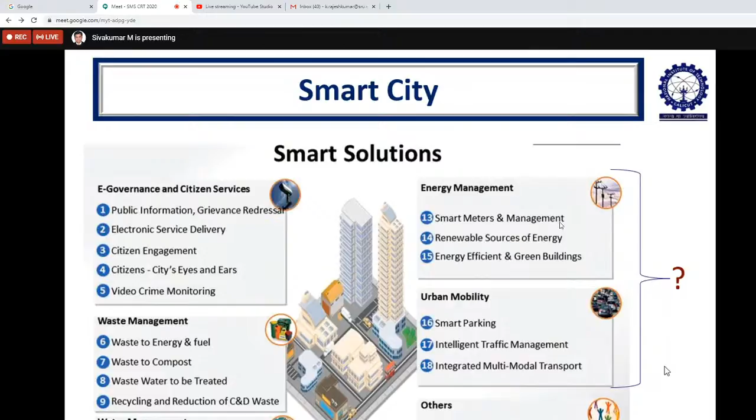It may be just a recall, because all of us know what is smart city, its components and solutions. The features of smart city would have been discussed already. Being the 11th session of this program, it may be a repetition, but to recall the smart city components and how I am relating it to pavement concerns, that's why I have indicated here.

When we take the features of smart city, I am specifically taking these 4 points. There are n number of points indicated in the guidelines, but these 4 points are with respect to road infrastructure. Mainly smart city is implemented for promoting mixed land use, meaning commercial activity as well as residential activity or educational activity, everything in a single platform.

Mixed land use will help for growth of people, even in unplanned areas. The people living in unplanned areas may not have received any implementation for the last decade. But with smart city, even the corners, the tail end points, will be connected by providing better transportation facility through better road infrastructure.

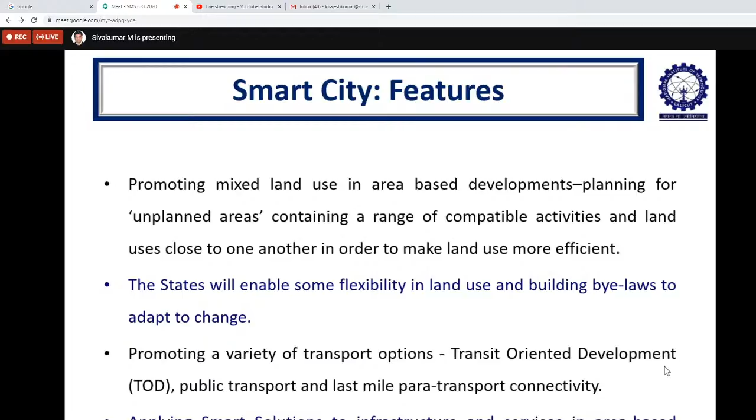Based on that, we can promote transit-oriented development. Once these roads are implemented in such quality that people can occupy both sides, we know transit-oriented developments promote public transport usage, which we can increase, while also connecting even the last point of the country. So by applying smart solutions, how this road infrastructure can be designed by selecting smart or sustainable materials, we are going to discuss in this presentation.

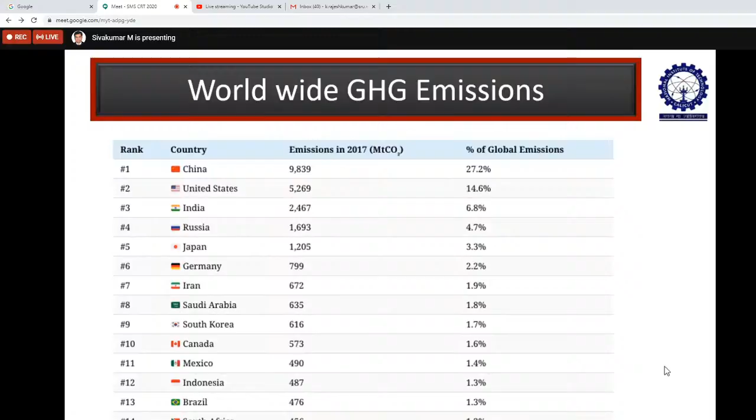When we think about sustainability, mainly in terms of GHG, greenhouse gas emissions, I am concerned more with Indian conditions. India is ranked third in 2017 emissions, at 2467 million tons of CO2, contributing nearly 6.8% of global emissions, even though it's 6.8%, it is ranked 3rd in contribution. According to carbon brief data publication, in 2017 alone, India contributed 1.8 tons of CO2 per capita to global emissions.

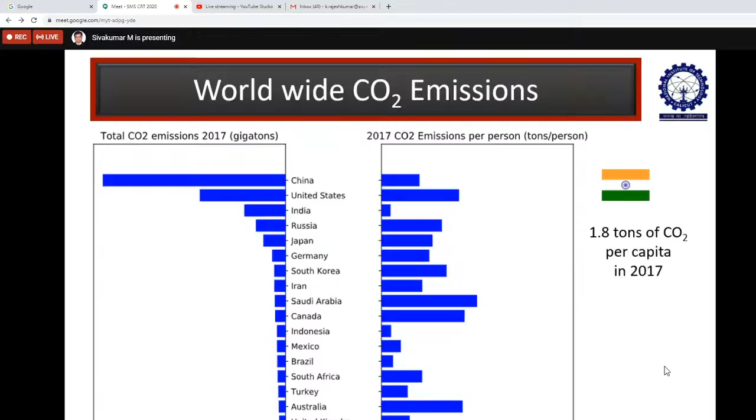What are the sources of this pollution or these emissions? Mainly the major concern is around 45% air pollution from dust and construction of infrastructure, whether building or road or anything. Again, the movement of vehicles, that is transport, contributes 14%. So adding it up, nearly 59% is contributed by the transportation sector plus residential construction or any other construction activity. For construction activity, movement of materials by transportation becomes an important role.

Then automatically the service, that is the road, should provide smooth riding quality. Then only the vehicles will move at the desired speed. If the roads are not in good condition, speeds will come down, more unburned fuel, fossil fuels, will be there, and automatically emissions will increase. When more vehicles move in slow conditions, the contribution to emissions at that location will be high. Next, waste burning contributes only 17%.

We may think that industry contributes more, but it contributes only 8%. So here the major portion is contributed by construction activity and the dust developed from different resources.

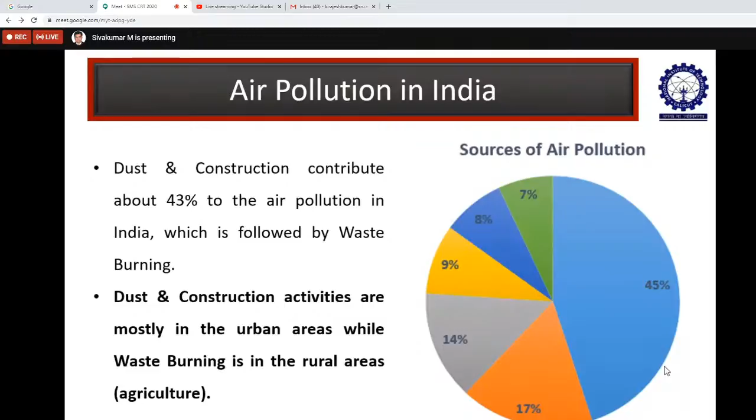This is how the three strategies are planned. The first strategy is the business-as-usual scenario, meaning if the same vehicles with internal combustion engines keep running, then by 2050 we may be producing more CO2, around 4,600 megatons.

That will be equivalent to 2.1 billion passenger car emissions. Passenger car units are taken because transportation emissions are expressed in equivalent passenger car units. So if 2.1 billion cars' worth of emissions exist, the number of vehicles equivalent to that is 2.1.

The second strategy is electrification and automation, again used individually, not by sharing. There, emissions will be reduced to 1,700 megatons of CO2.

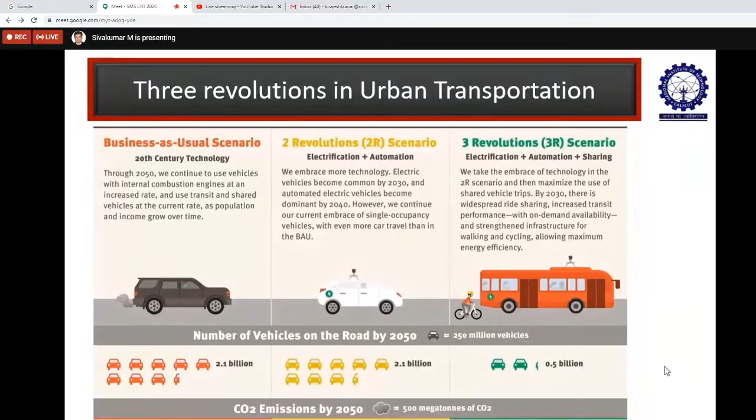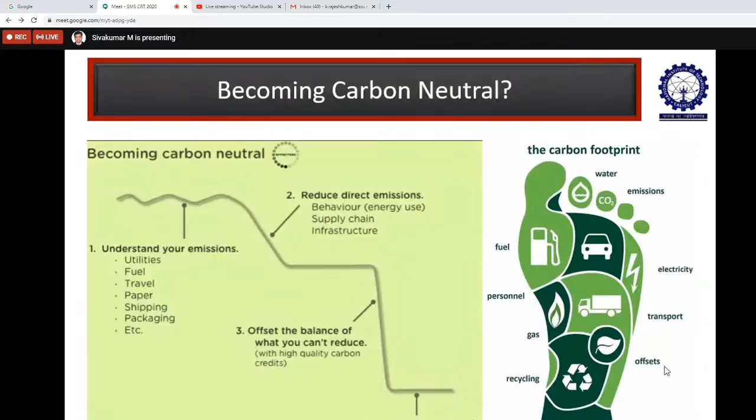If more bicycle usage is there, as you can see in this graph, it leads to more reduction—reducing carbon emissions close to zero. It can be achieved through bicycle usage, but practically it may not be possible because it takes more travel time. So that is different.

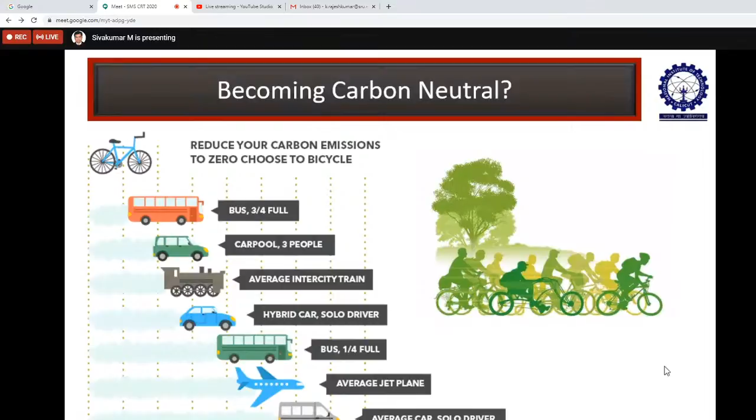But if you take the bottommost one, an SUV or solo driver individual vehicle usage, it reduces only 1.6 pounds per passenger mile. This is the reason why sustainable material should be used in pavement construction.

The next immediate solution involves the strategies or stages of road construction. Once materials are selected and pavements are designed, they are constructed. During the service life, there will be rehabilitation. Even after rehabilitation, there may be progressive deterioration—cracking, rutting, or other failures may take place, until the material reaches the end of its life.

That means after that point, the materials cannot be used as they no longer satisfy the desired properties—whether it's aggregate, binder, or road materials—so they can be disposed of. But if some quality is retained and it can be used further, then it can be reused, as it is.

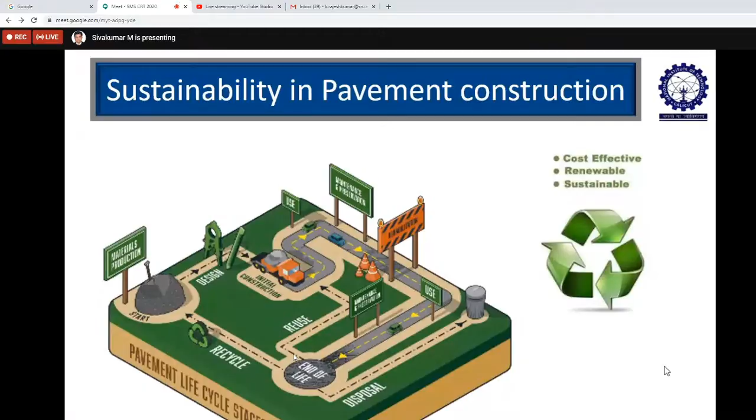Otherwise, we can go for recycling, meaning adding rejuvenators or new virgin materials. If binder quality or quantity is insufficient, we add more binder to the existing mix, remix it, and construct again. Likewise, recycled aggregates can be directly reused. But we must ensure the recycling or reuse technology is cost-effective, renewable, and sustainable.

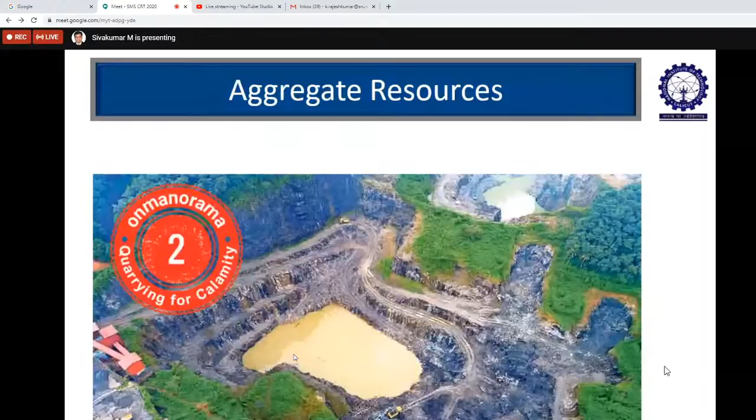This is one of the problems driving us towards sustainable materials: scarcity of aggregates. Most of the hills are disappearing now; there are no hills left with good quality rocks, everything is taken away. This is a picture from a Kerala location published in Manorama News, where aggregates are taken away, broken, and segregated into different sizes for constructing buildings or other construction.

Next to building construction, the major contribution for aggregate use is road construction, whether it's a bituminous pavement or cement concrete pavement.

When you take the case of bituminous pavement, there are different layers. The natural soil subgrade is either the same material or material brought from a nearby location, meant to achieve a CBR of 10% and be compacted. Just above the subgrade, the granular materials layer begins, where aggregate usage increases. All the top 4 layers above the subgrade consist of large amounts of coarse aggregates.

In the intermediate and surface layers, bituminous materials are used as binder - bitumen binds the aggregates. This is taken care of in the top 2 layers.

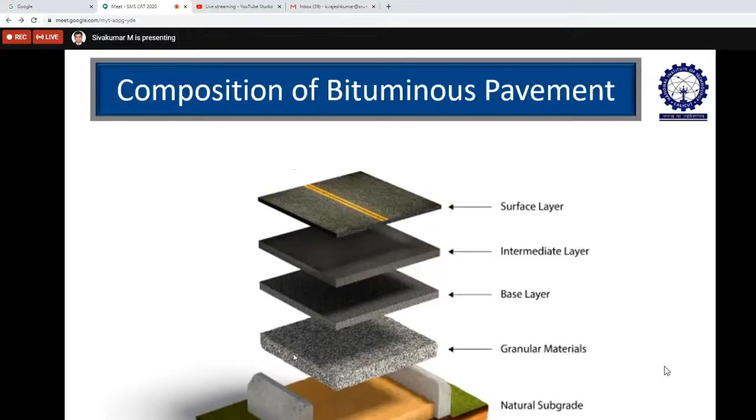What happens over the period? For example, when we design the pavement as per IRC 37 guidelines, we may design for 20 MSA or 50 MSA million standard axles, maybe for 500 mm thickness. After the rehabilitation period, the thickness may increase due to the rate of increase in traffic growth - the axle load increases, so automatically an overlay is provided to strengthen the pavement's structural and functional characteristics.

Over a period, what happens is this: material that disappears from one location is found here as a huge hill - meaning the material is reused for constructing another layer on the road itself, becoming more aggregate. To avoid using more material, if you keep constructing overlays, the bottom layer will have aggregates that may be reused material. Good quality material may still be there - it may not have 100% quality, but it may have 70%, 60%, or even 80%. These materials just lie below the overlying layers.

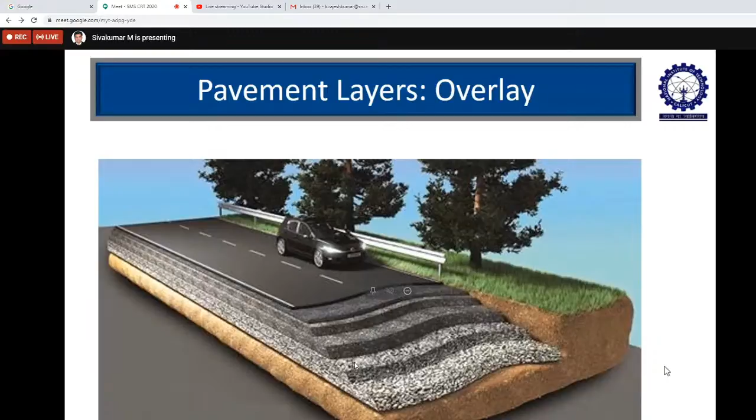So here the technology implemented is recycling - meaning whatever materials already exist in the existing bitumen layer can be recycled for construction of additional pavement layers.

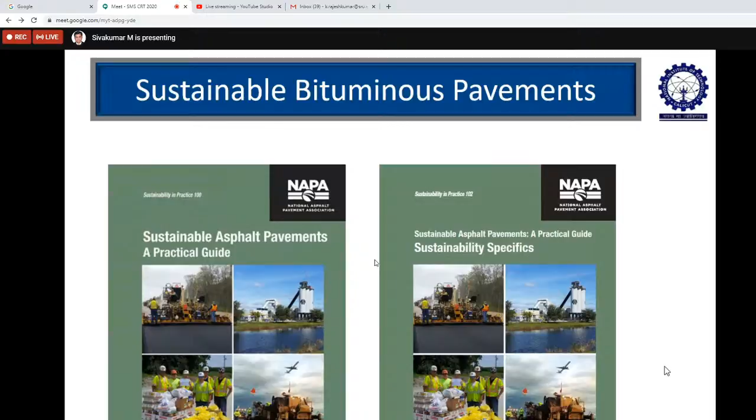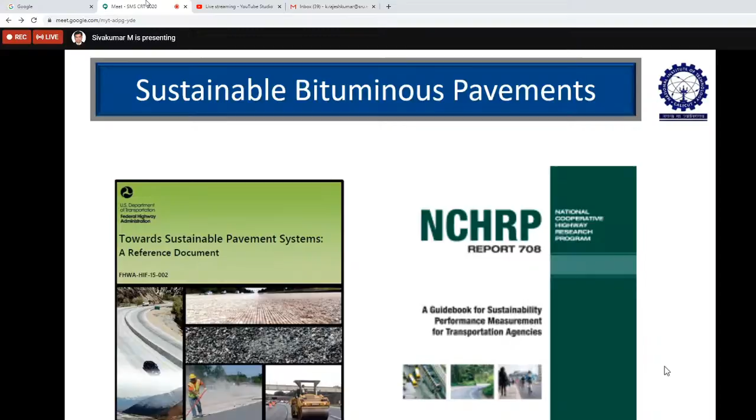This definition we all know - one recognized worldwide, I think: the Brundtland Commission, given in 1987 itself, states that humanity has the ability to make development sustainable, to ensure that it meets the needs of the present without compromising the ability of future generations to meet their own needs. This definition all of us know, so I'm taking the same quote.

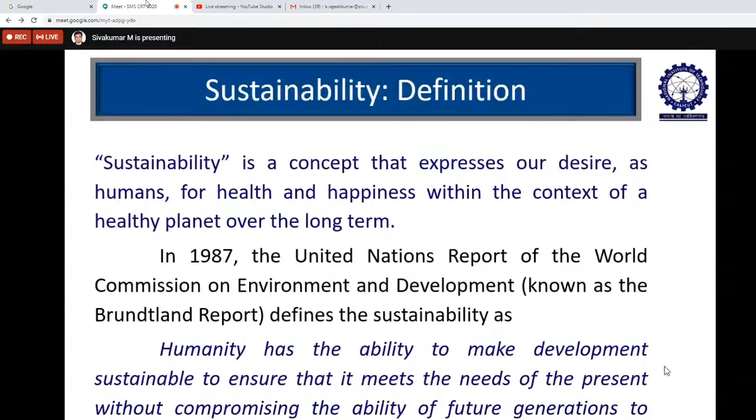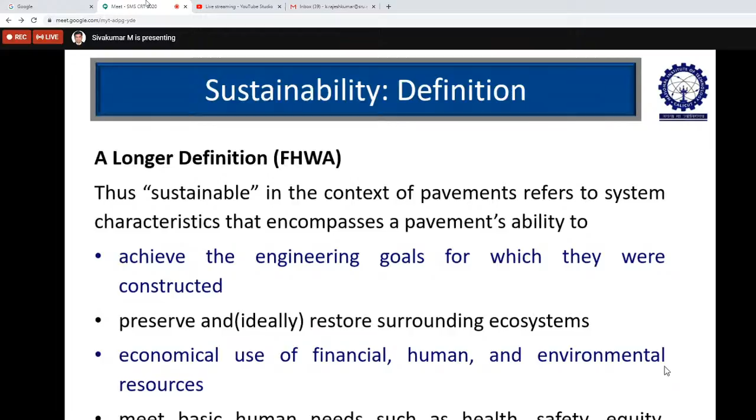As a longer definition per FHWA, sustainability mainly means achieving the engineering goals for which roads were constructed, while preserving, or ideally restoring, surrounding ecosystems. Wherever roads are constructed, the ecosystem should not be affected - whether in the city, open area, or forest, different construction technologies should be used without affecting ecosystems. Financial, human and environmental resources should be used economically, and basic human needs such as health, safety, equity, and employment should be met. This is the long definition given by FHWA.

As far as sustainability in pavement, a sustainable pavement can be defined as we recall while designing the pavement: the aim of the road is to provide safe and efficient, effective movement, constructed using economic resources. This is recalled as a safe, efficient and environmentally friendly pavement that meets today's transportation needs without compromising the ability to meet future needs. That is the main thing. Mainly in the transportation sector, bituminous pavements are mostly constructed.

Even in the Indian case, more than 90% of constructed roads are bituminous pavements - that is the black top road, identified by color. In these, the top layers - the wearing course, binder course, or even the base course - can be constructed with bituminous materials. These materials have different functions, and how these functions are satisfied we will see in further slides.

The principal criteria for selecting or designing a sustainable pavement is mainly optimizing the use of natural resources. As far as possible, if we take aggregates, we can reduce virgin aggregate use - instead of always using new aggregate for construction, we can reuse recycled aggregates. That is one way.

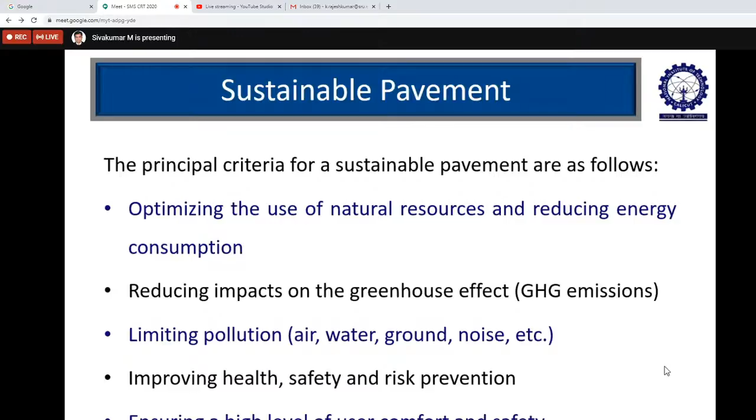When we talk about energy consumption, it is mainly related to construction, maintenance, rehabilitation and recycling of pavements. All these four stages will be taken care of for energy consumption.

Because of pavement sustainability, when we go for smart city development and new projects, there will be new road development and also habitat loss - either people living there may get affected, or people living far from new roads may move near them. There will be habitat loss as well as fragmentation, change in locality, and water quality or hydrological cycle may change. Air quality may also get affected when new pavement is implemented. So all these components contribute to sustainability.

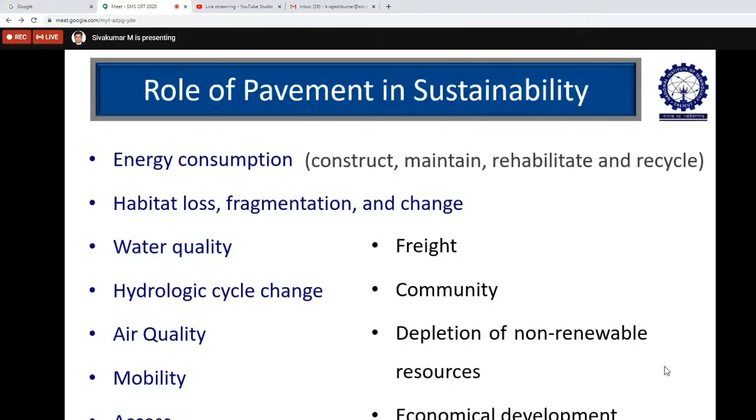How can this be achieved? These are the three stages I am going to discuss in this presentation. First stage is material production. Second stage is how it can be constructed. Third stage is how effectively this pavement can be designed with sustainability implications. So these three major components will be discussed.

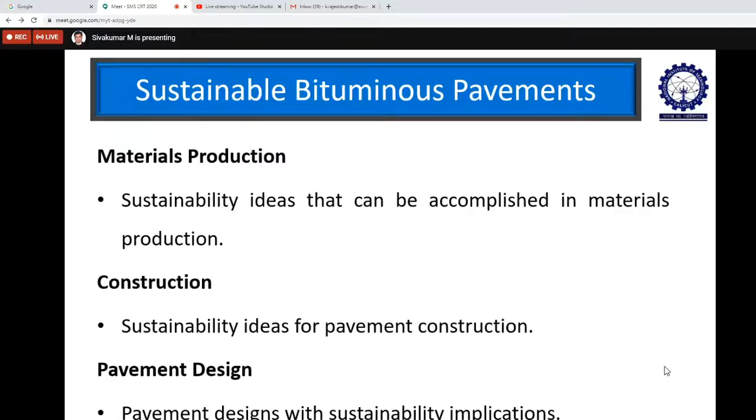Under the material production stage, it refers to the raw material - how it is processed and what equipments are used for the production of bituminous mixes. That is the raw materials, how it is mixed and then how it is laid and constructed. So the production of bituminous mix is also a major concern here.

If you take the components, it can be aggregate, binder, or modifier. It may be a bitumen modifier, otherwise an additive can be added. Otherwise we can go for alternate materials also. So mainly for these three material components, we have to identify what are the alternatives.

For example, recycled aggregates can be used. Instead of hot mixed asphalt, that means hot mixed and hot laid bituminous mixes, we can go for warm mixed asphalt or cold mixed asphalt. That means with reduction in mixing as well as compaction temperature, or even the ambient temperature, we can go ahead.

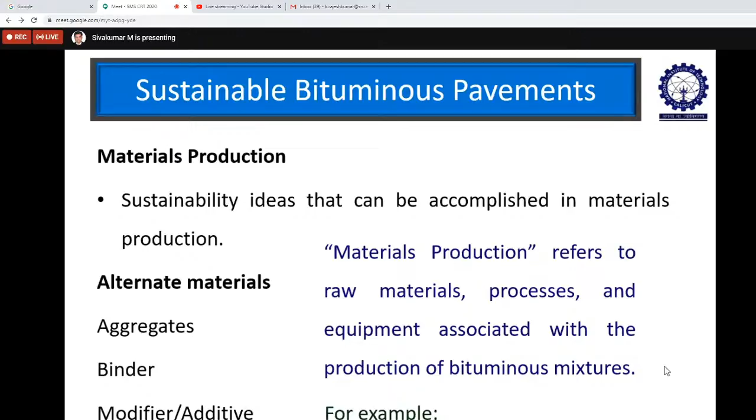So for that, these are the objectives. One of the objectives is to reduce the amount of virgin aggregate used. Here the virgin aggregate is the raw aggregate which is new, which is not used in the road construction, which are going to be used.

For the aggregate material objective, to improve sustainability, the approach will mostly be from recycled and waste materials, RCWM. If you take it with the economic impact, it can save more cost of new aggregates. For the environmental effect, more recycling taking place means environment will be saved.

That means more number of hills will not be demolished, that means less usage of raw aggregates. Then social effect is preserving the virgin aggregate sources. That is one of the advantages for the strategy.

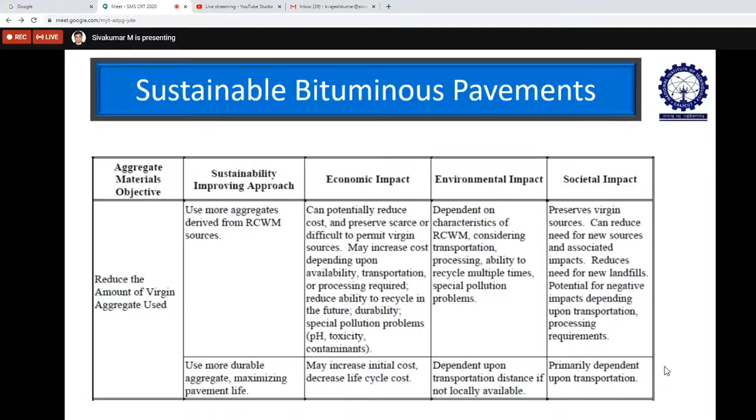Second one is reduce the impact of virgin aggregate acquisition and processing. The aggregates meeting the high quality required by MORTH standards or IRC standards or Indian standards may not be available near the road which is going to be constructed. It may be brought from long distance - then transportation, storage - all those processes can be avoided by recycling the aggregates.

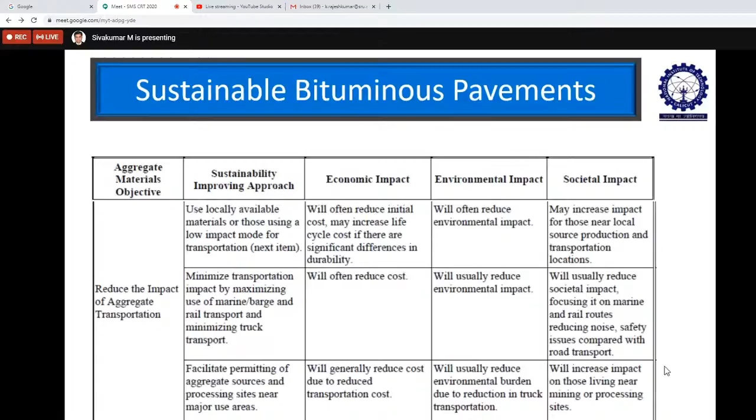And this is the example - thereby we can reduce the number of vehicles used for transporting aggregates from long distances. That is reducing the impact of aggregate transportation. That is one of the strategies that can be adopted. So that is for the aggregate point of view.

Then we take the number of layers. We know that flexible pavement composition has surface course, binder course, base course, granular subbase course, and compacted soil subgrade. So since it is a bituminous course, we will be more concerned about the top 3 layers.

The topmost layer is in more contact with the traffic plying on the carriageway, the paved surface. So it is expected that such a quality provides a smooth and safe riding surface, and it should exhibit resistance to cracking under fatigue loads, especially the second layer, binder course layer, as well as the base layer.

Then it should have excellent load carrying capacity as well as capability. When the load is distributed, we know that in the bituminous pavement, grain to grain distribution is taking place. So when distributed from the top layer to the bottom layer, there should be more reduction. It should have good load carrying capability, and at the same time the load stresses should be reduced by the thickness designed for each layer.

Then it should be impermeable - that is, the top layer should be impermeable. So we will be going mostly for dense graded bituminous mixes. Then it should be stable.

That means the top layer materials used for surface course construction should be stable under heavy loads. Most roads in Indian conditions, if you remember, are not failing because of more load repetitions or environmental characteristics alone - it is mainly failing because of heavy loads, more than the legal load permitted.

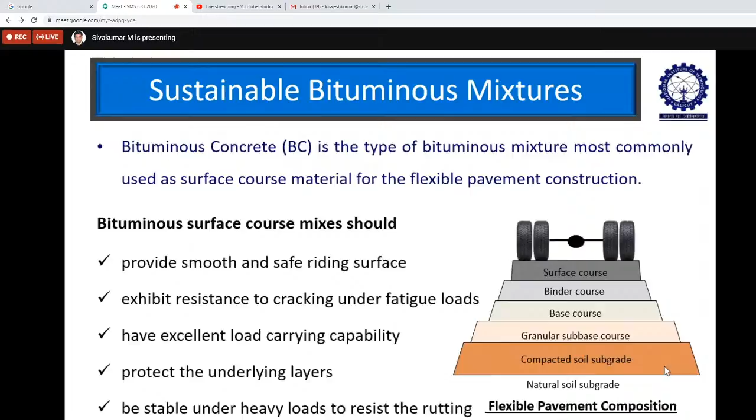Then, from the sustainability point of view, what are the factors to be considered while designing bituminous mixes? For that we should identify the causes and effects. Suppose if the mix design or the production mixture has insufficient mix temperature maintained, or insufficient compaction temperature maintained during production and construction of the pavement, then it may lead to insufficient binder coating.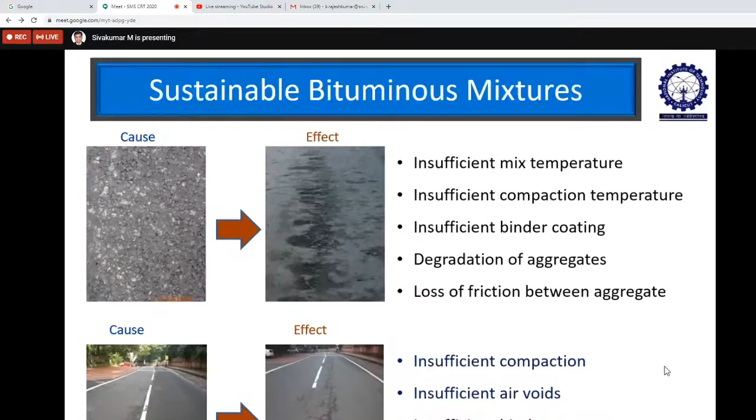Next, if there is insufficient compaction or insufficient air voids, compaction should be sufficient, but at the same time not overly compacted, otherwise it leads to insufficient air voids. This leads to cracks on the pavement layers, specifically longitudinal cracks from the top down. If these cracks are structural, they become progressive cracks leading to pavement deterioration. These are the major problems we face in bituminous pavements.

So how can the bituminous mix play a role in controlling these three failures: permanent deformation, otherwise called rutting, fatigue cracking, and stripping and raveling? Let's discuss how the bituminous mix can help control these failures. Plain bitumen is commonly used, but it may not be capable of satisfying these conditions, so we have to go for modified bitumen.

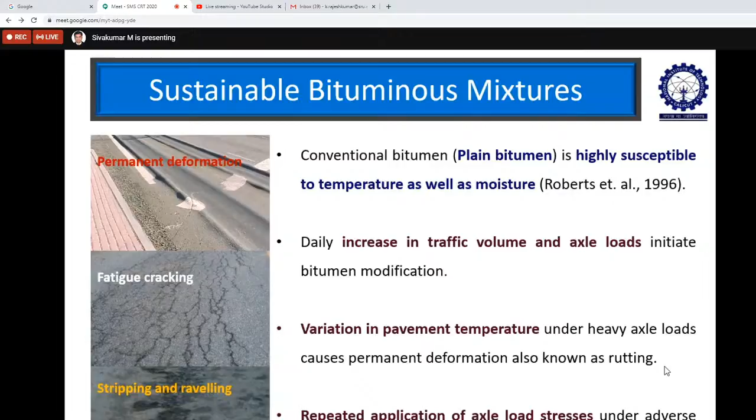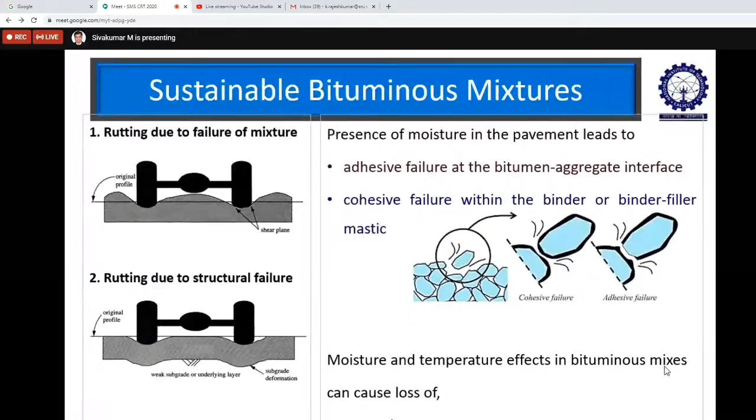As already indicated, repeated application of axle load stresses, especially in heavily loaded areas, causes issues. There are two types of rutting: mix rutting and pavement rutting. Mix rutting can be controlled by designing bituminous mixes with sustainable materials, considering moisture and temperature effects during the mix design stage. Looking at alternative materials for aggregates, many alternative aggregates have come into use, especially fillers.

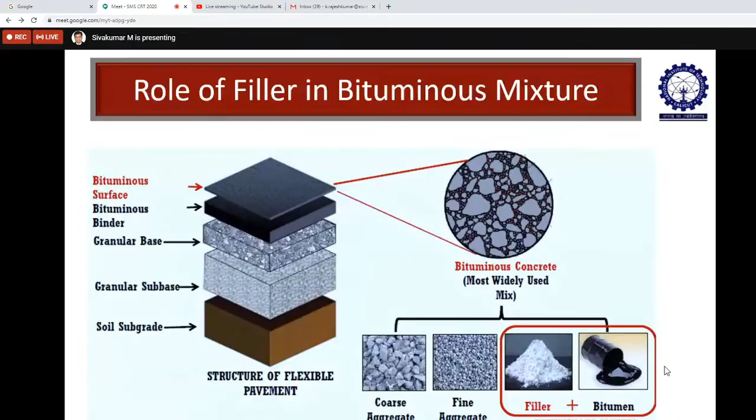In the filler component, the main function of filler is to fill the voids. At the same time, it acts as a binder extender, meaning the filler absorbs the bitumen and also acts like a bituminous mastic. There are more alternate fillers being practiced, and more research has been done in this area. The function and role of filler depends on the type of filler and filler content in the bituminous mix, which can provide better raveling resistance, better temperature cracking resistance, better fatigue resistance, better rutting resistance, and better stripping resistance. Some alternate fillers naturally have anti-stripping properties, making them more economical.

Some examples of alternate filler materials are presented here: ceramic waste dust or recycled brick dust, coal fly ash, marble dust, granite dust, sewage sludge ash or rice husk ash, coal waste powder, bauxite residue, copper tailing, or limestone sludge. These are just some examples listed here. All these alternate materials are reused in filler quantity and have been tested through research.

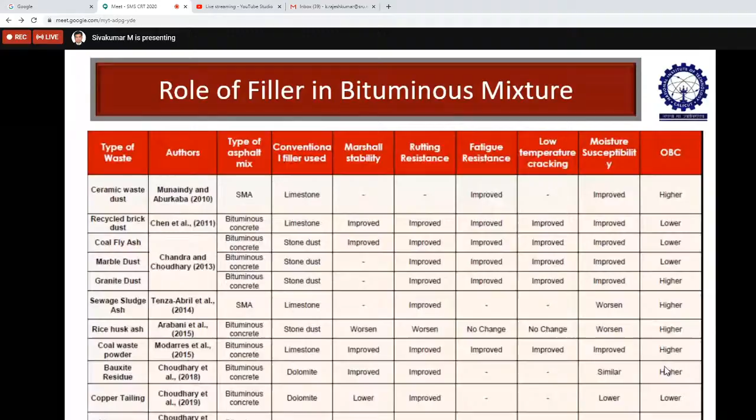These materials satisfy requirements and improve properties such as Marshall stability, rutting resistance, fatigue resistance, low temperature cracking, and moisture susceptibility of bituminous mixes, mainly affecting the OBC. Some fillers lower the OBC, while others increase it because of surface area effects. References are given so this can be checked later.

Next, while selecting the bitumen for mixes, viscosity graded bitumen is used in Indian road construction. There are four grades: VG40, VG30, VG20, and VG10, with viscosity measured in thousands. For a rut-resistant mix, I may select VG40, used in highly stressed areas such as intersections or near toll booths where high stresses may cause fatigue cracks as well as rutting, so I can go for VG40.

Whereas fatigue cracking requires a more softened grade bitumen, meaning I can go for VG10. For Indian conditions, which are mostly tropical, VG30 is the most preferred grade for bituminous pavement construction, as you can see in the code books. This table is taken from IRC 111/2009.

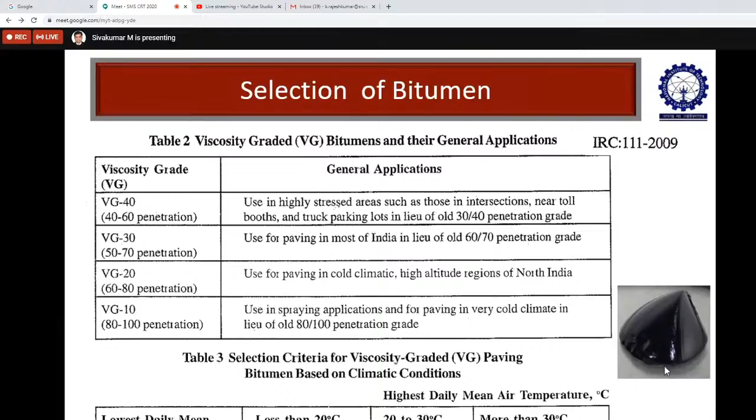Bitumen specification is the property of the plain bitumen. We can verify IS 73/2013 publication, where the viscosity grade bitumen started in use. This particular table will give you what properties should be tested on bitumen and what values it should have. So the specifications are given by IS 73/2013.

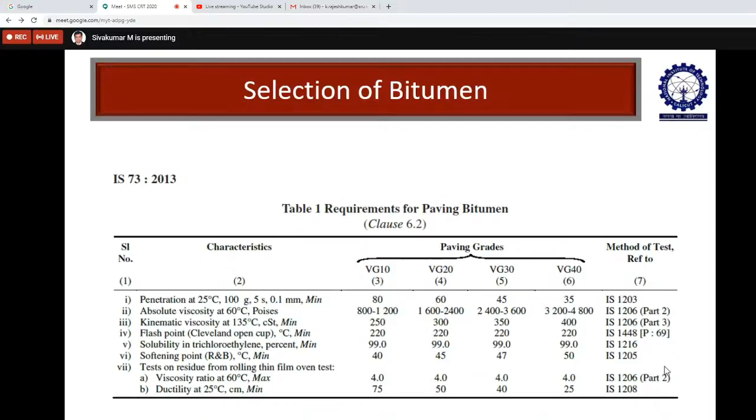The major concern is the grading. We take absolute viscosity, whereas for the mixing and compaction temperature we take kinematic viscosity. So these are the correlations.

Majority of these tests are included in Superpave mix design, so that it can produce superior performing bituminous pavements. As far as Indian conditions, for plain bitumen we use only the penetration test, penetration index, softening point test, or capillary viscometer test as per IS 73 2013, and standards are available in IS 15462 for modified bitumen.

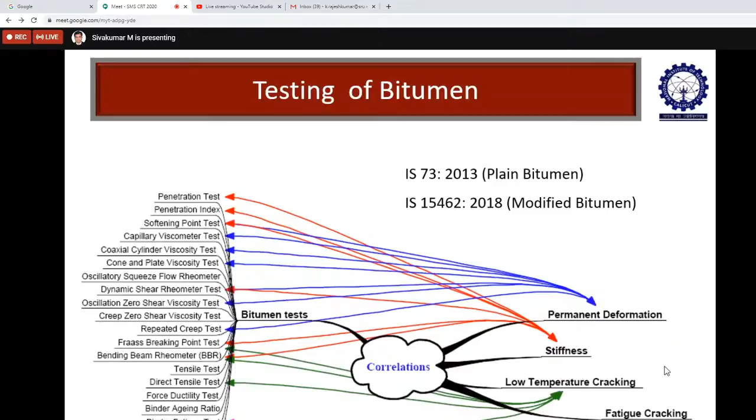For aggregate properties, especially size and shape, porosity, strength, toughness or hardness - these are the properties of aggregates. The respective standards are given both by Bureau of Indian Standards as well as ASTM standards. All these should satisfy the requirements given by IRC guidelines or the Ministry of Road Transport and Highways guidelines.

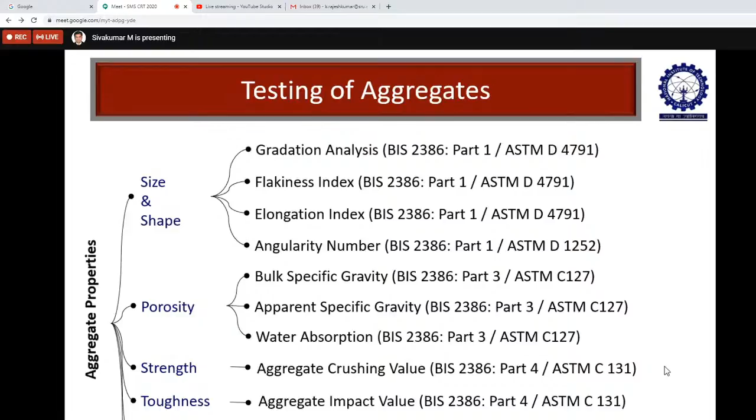When we select the bituminous mix, for the dense graded mix, IRC 111 gives dense bituminous macadam as DBM, or semi-dense bituminous concrete SDBC, and bituminous concrete BC. As I understand, SDBC is not recommended nowadays. Only bituminous concrete and dense bituminous macadam are practiced now in the field.

Next, how the mix should be designed. There are three technologies followed: hot bituminous mixture, warm bituminous mixture, and cold bituminous mixture. You may remember these as hot mix asphalt, warm mix asphalt, cold mix asphalt.

This refers to the temperature during mixing, laying, and compaction. If it is compacted between 150 to 180 degrees, with mixing, laying, compacting process, it is hot bituminous mix. If it is 110 to 140, it becomes warm bituminous mix. If it is 15 to 40 degrees Celsius, that is cold bituminous mix, mostly constructed at atmospheric temperature.

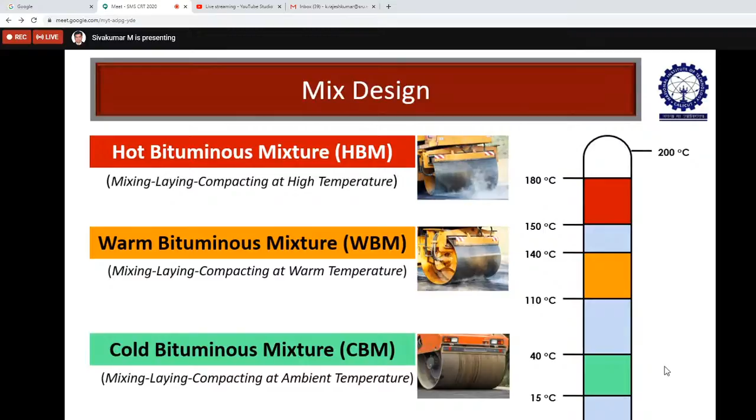For this, mix design guidelines are available - Asphalt Mix Design Methods Manual Series 2, 7th edition, and the next edition has also come up. For Superpave mix design, guidelines are published as a special publication, and design guidelines are available in NCHRP. As far as Indian conditions, we are still following the Marshall method of mix design, given by Asphalt Mix Design Methods Manual Series 2, MS2.

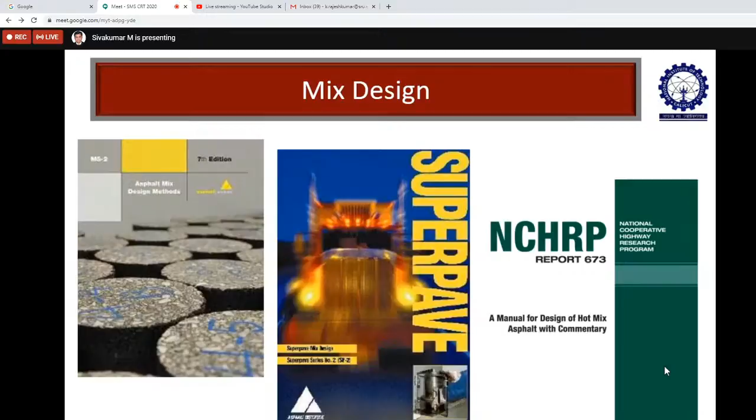Regarding construction, what new developments have taken place from the sustainability point of view - there are pavements constructed with self-healing property within the bituminous mix itself. As discussed previously, fatigue cracking is one of the factors causing deterioration of pavements. So if the bituminous mixes have self-healing capability, it can be rectified automatically based on that healing property.

Nowadays nanofibers or microcapsules are used as heating elements within the bituminous mixture itself, so that through microwave radiation developed within it, or by absorbing solar radiation, or heat generated by vehicle movement, it can self-heal - that is, the cracking can get closed. So self-healing pavement is one of the sustainable technologies followed.

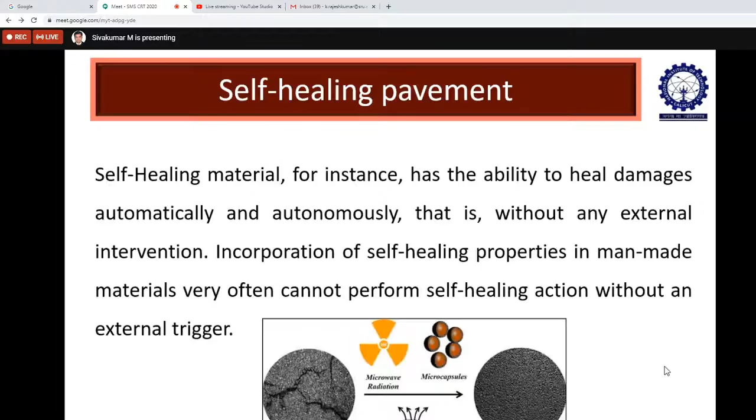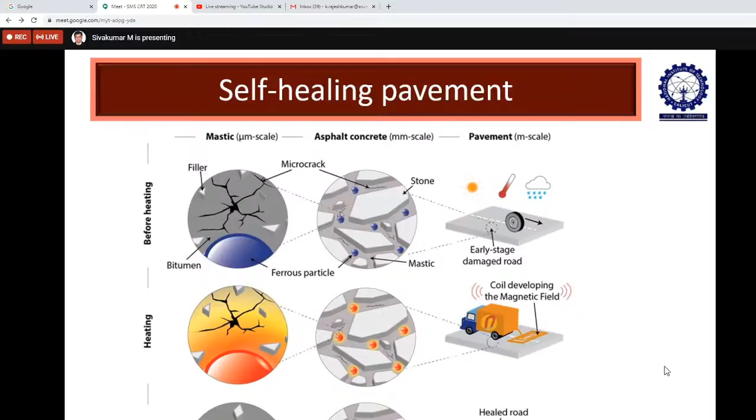So this is the process which explains the self-healing properties, that is after heating how the cracks are getting healed or closed. And there are studies proven that the self-healing technology is also becoming successful based on bitumen properties, bituminous mix composition, and environment characteristics.

For example, if you take the bitumen properties: bitumen type, viscoelastic properties, surface free energy, aging, diffusion, and modifier characteristics, these are also studied by many researchers.

Whereas in the bituminous mix composition, bitumen content plays a main role, along with aggregate structure, gradation effect, and layer thickness as designed. Environmental characteristics, temperature effect, loading history, and the rest period between axles and between vehicles are also considered. The effect of moisture on bituminous mixes is also taken into consideration during the research.

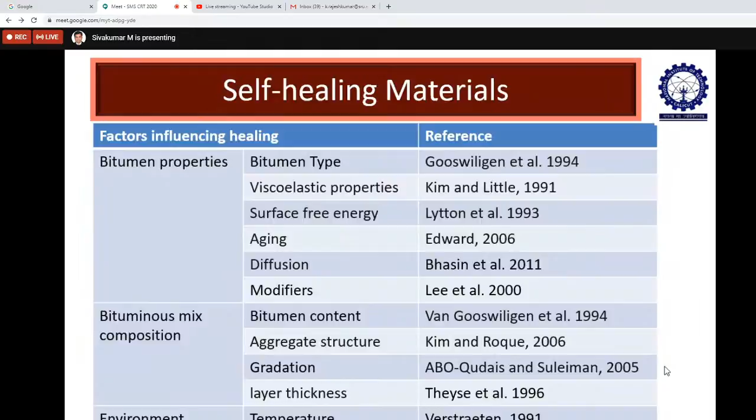Another technology is harvesting energy from the pavement. This technology is coming up, but it's still under research I think. Based on the NCHRP report, we can harvest energy from vehicles moving on the road surface by keeping capsules or piezoelectric materials in the pavement.

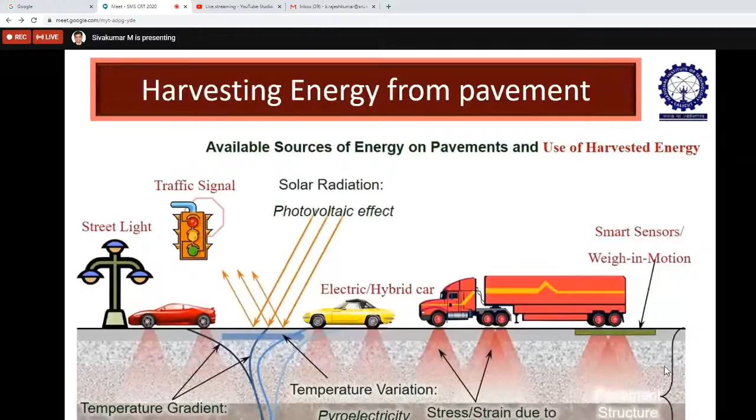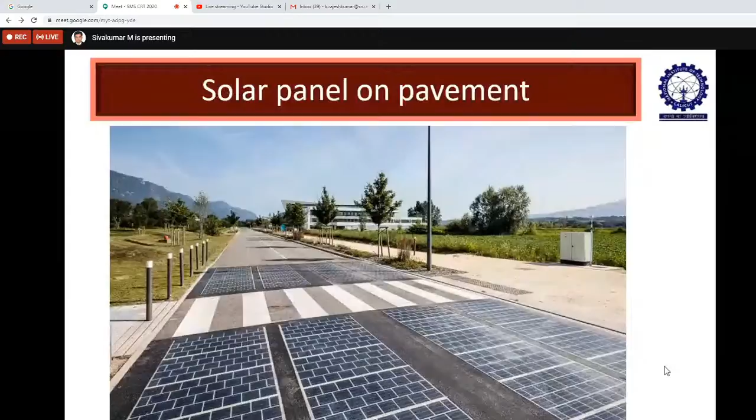Then there's another method, solar panels on pavement. This is also coming up, but the loading capability is still under research. I don't remember any roads constructed here in Kerala with this. The solar panels can be used under the wheel path, directly under the wheel path, so that even during the movement of the vehicle, heat energy can be generated.

Next, while designing the flexible pavement, one method is MEPD, mechanistic empirical pavement design. After 2001, IRC 37 also follows the mechanistic empirical pavement design with some compromise, where material quality and traffic characteristics are considered for designing the pavement.

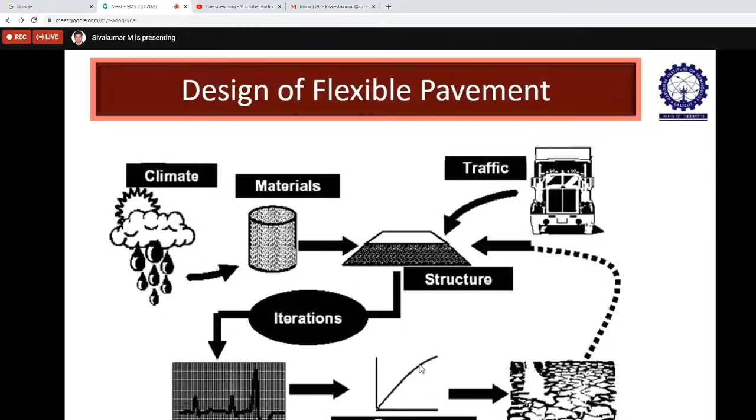The mixes will be tested in the laboratory for prediction of responses. Then it will be redesigned, that is, a number of iterations will be tried, then the best will be recommended for road construction. These are the two references I have taken for the design of flexible pavements: for design guidelines, IRC 37 2018, and for the standards of materials or thicknesses, MoRTH specifications.

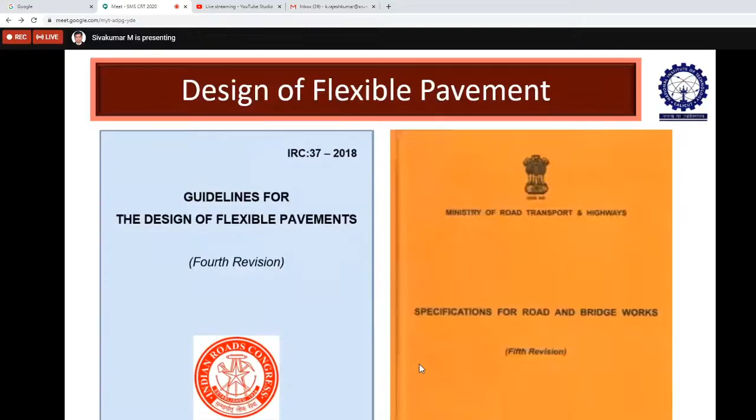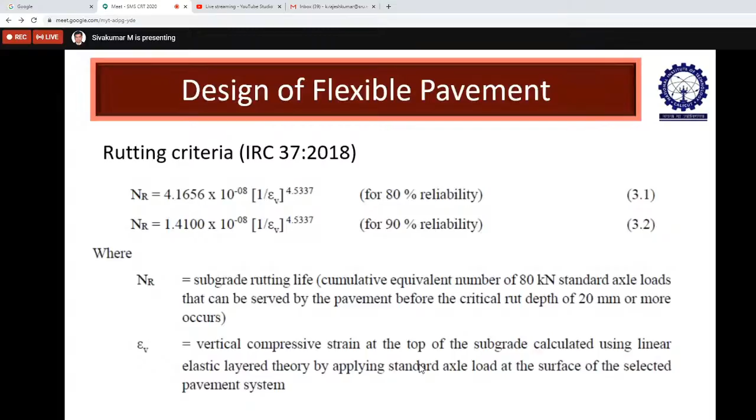As discussed in the previous slides, rutting criteria is a major one where the mechanical response is observed. The models consider both 80% reliability and 90% reliability in IRC 37, and also the fatigue criteria, where the mix volumetric properties, in terms of volume of air voids and volume of effective bitumen, are also considered, since the volumetric property contributes to fatigue failure of the pavement. So both criteria are considered with the mechanical response.

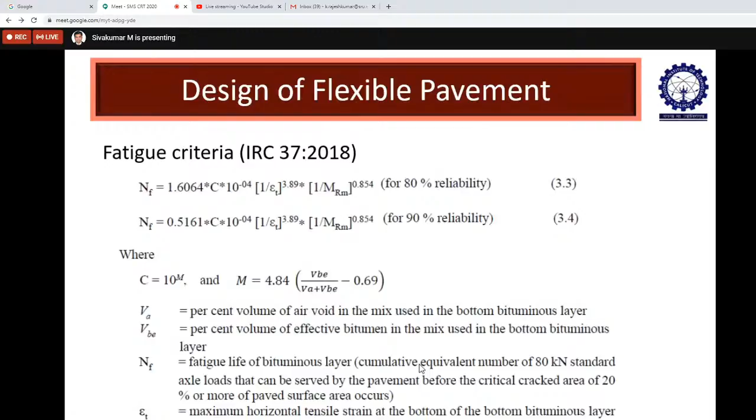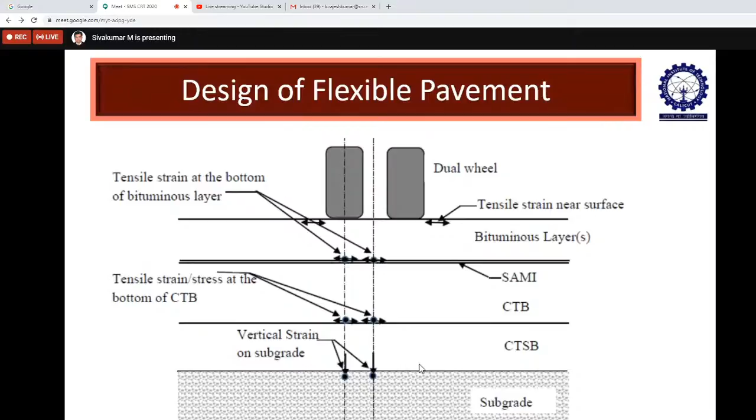Okay, but if you look at the base layer and sub-base layer, it is CTB and CTSB, that is cement treated base layers and cement treated sub-base layers. So the base layers and sub-base layers also become bound layers. Earlier the composition was unbound, here unbound layers are treated, whereas here it becomes a bound layer. Then automatically the stress reduction will become less. That means on the top of the subgrade, less stress will be implemented.

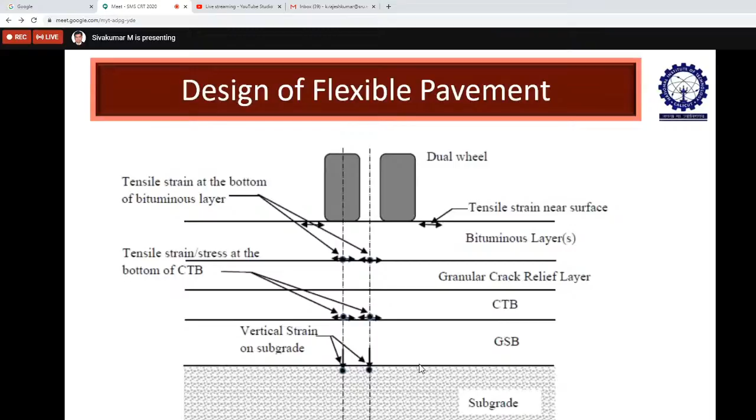This is the fifth composition as well as the sixth composition, also the same. So here the main component is, among all the 6 compositions, if you see, there are provisions to use sustainable technology for construction of each layer. That is what I want to indicate here. So we can accommodate sustainable technology in the pavement design stage itself.

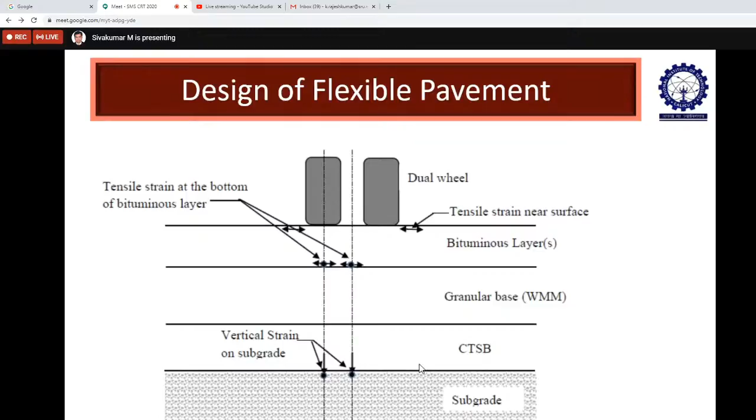One of the technologies which I want to specifically discuss is recycling of pavements. That is, if the pavement is damaged. So here the damage of pavements which are not containing any fibers. Okay, if the fibers are there, that is not suitable for recycling. So only the plain bituminous mixes used, then we can take that pavement as a recycling pavement, which can be milled.

And one of the technologies, there are hot technology as well as cold mix technology also. So I would recommend, from a sustainability point of view, recycling can be done with the cold mill and then cold recycle. That can be followed for the sustainability point of view. But even hot mix also, it is sustainable only because we are reusing. The problem in the hot mix will be more number of equipments with high emissions.

It will be used inside, that is in situ construction, it will be causing more pollution. That is one of the problems arising, even though it is a sustainable technology. That's why I would recommend the cold method.

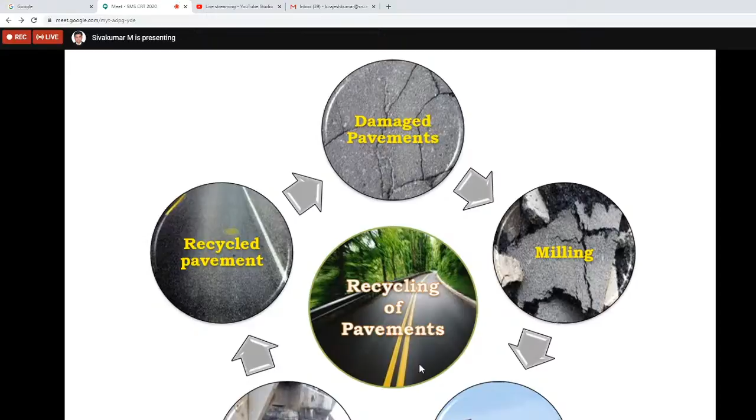Okay, so once the materials are milled, that is the damaged pavements are milled, the materials can be brought to the central plant, or in the site itself it can be designed and then constructed. So as I told, even in bituminous pavement as well as cement concrete pavement, it can be recycled. So the method: surface, cold mix and hot mix. Surface method also both cold and hot in place, that is central plant as well as in situ construction can be followed.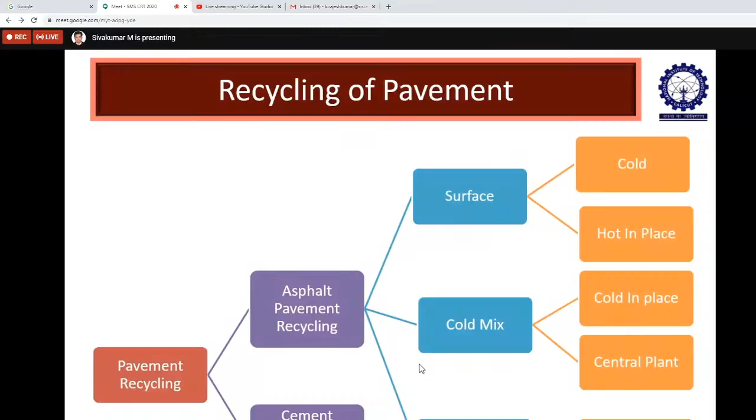Among that, the cold mix, if we take cold in place or cold mix technology in central plant, that is bring the materials to the central plant in the nearby location itself. It can be broken and then redesigned, that is the mix can be designed and then transported for the site. Both can be followed in the cold mix one.

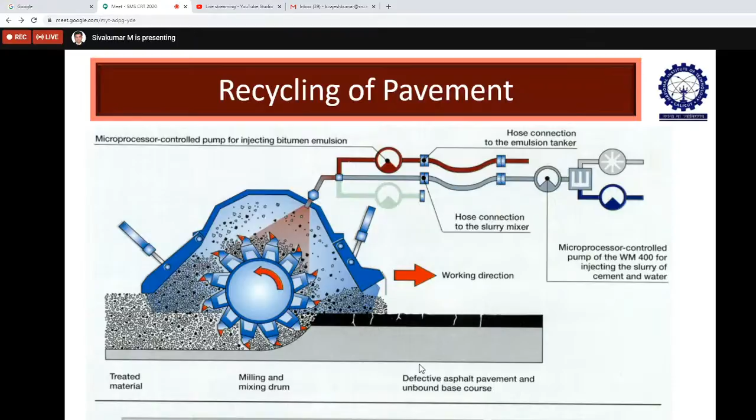This is what I was talking about. There will be a chain of equipments as well as vehicles used for construction, in situ construction of recycled asphalt pavement. Okay, so recycling of bituminous pavement or asphalt pavement will be one of the sustainable technologies that can be followed.

Next one, cold mix technology. As I indicated, the cold mix technology can be followed for sustainable pavements. There is evidence they practiced this. As I understood, there were 2 technologies. One is Bitchem, along with CRRI they were there. Now it is separated, I think so.

So Bitchem constructed and then proved that the cold mix technology can be utilized and it can be effective and environment friendly also during construction. So for the construction activity as well as after the construction also, it will be eco-friendly.

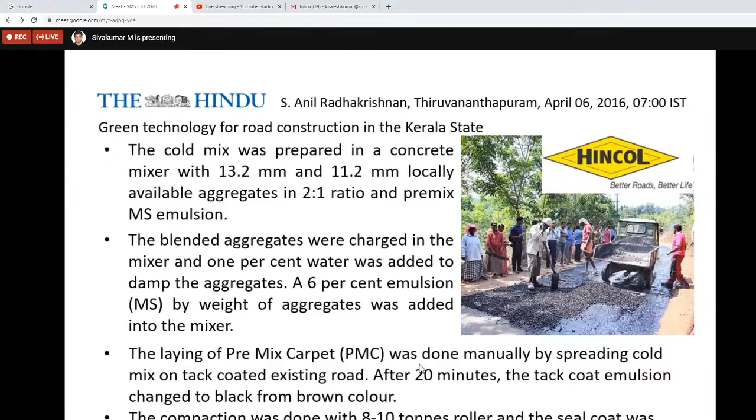Even in Kerala also, there are trial sections constructed with cold mix technology by using emulsions, especially with premix carpet layers constructed. But here the technology followed was with Hincol. They also have a cold mix technology. So the hot and cold technology is used in Kerala.

So where the cold mix can be used? One is in the top wearing course, the cold mix can be used.

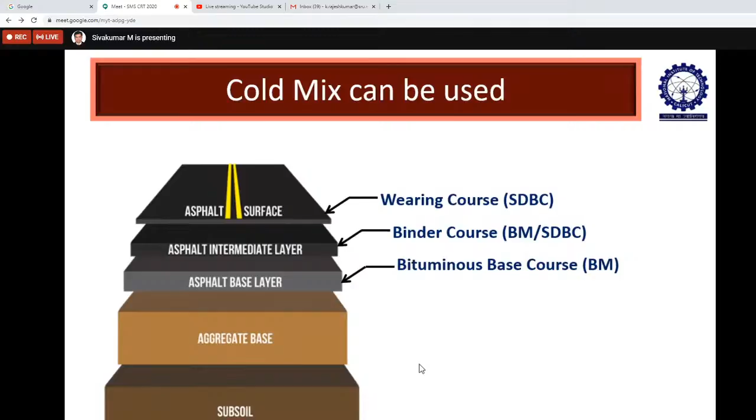When we use cold mix technology, so far it is recommended for low volume roads, as I understand. Whereas for binder course and base course, as discussed in IRC 37 2018 code book, we can use it in binder course as well as bituminous course, the cold mixed one. That is bitumen emulsion treated base course, sub-base course.

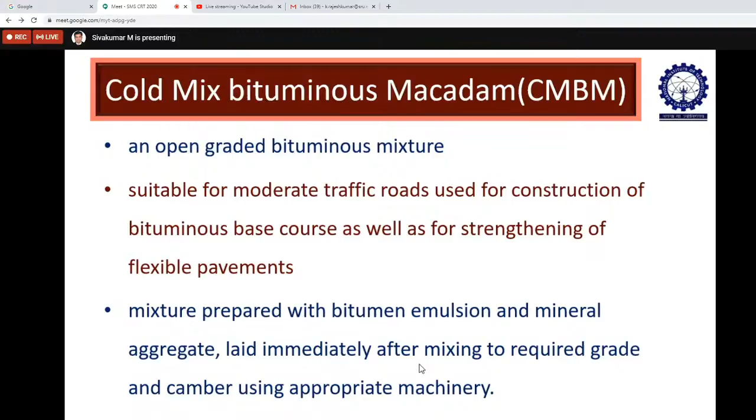One course I want to specify here is as a base layer, cold mixed bituminous macadam, CMBM. It is an open graded bituminous mixture where it gives the function of a base course layer. There we can use the bitumen emulsion treated layers. The specifications are given in IRC SP 100 2014, which is available.

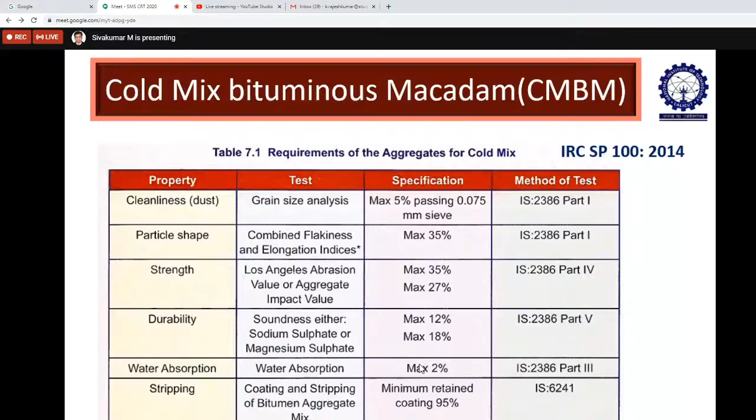These are the specifications, and some of the aggregate tests are based on IS 2386 part 1 to 5. We can even refer to AASHTO standards as well as ASTM standards, and MS14, the Asphalt Institute manual series number 14, which is on cold mix.

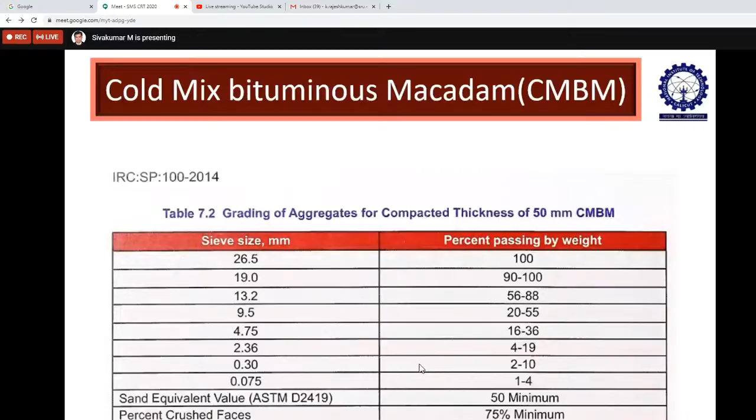The gradation requirement is also given for 50 mm thickness, for example, 50 mm cold bituminous macadam, that thickness is also given. So when we design the mix criteria, we can follow IRC SP 100, and now the methodology as well as the technology is also available for construction.

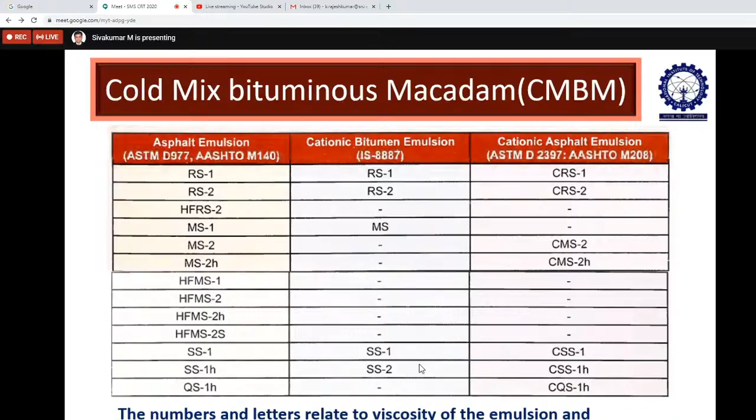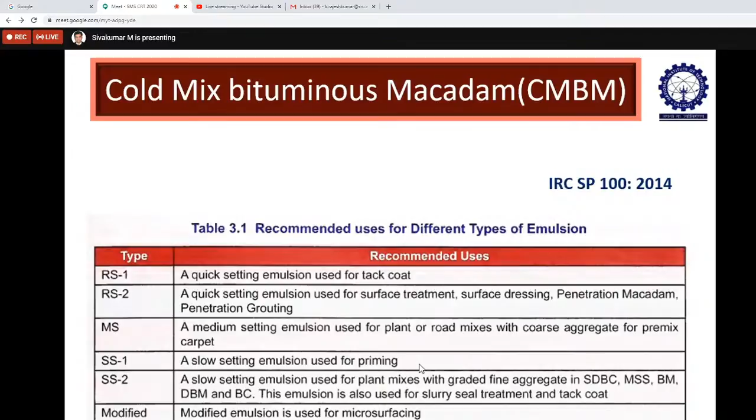Mainly RS1, the rapid setting bitumen emulsion, because of quick setting, can be used for the tack coat. For road mix, mostly medium setting emulsion will be used for mixing and preparation of mixes, especially for DBM and BC mix. There we can go for slow setting also.

So the advantage of cold bituminous macadam is it can be mixed, laid, and compacted at ambient temperature, that is the air temperature itself, and this can be used for roads constructed in hilly areas, mostly without affecting the wildlife. That means eco-friendly material as a technology, and there won't be disturbance by the emissions produced during hot mix. That can be avoided by implementing cold bituminous macadam or cold mix technology.

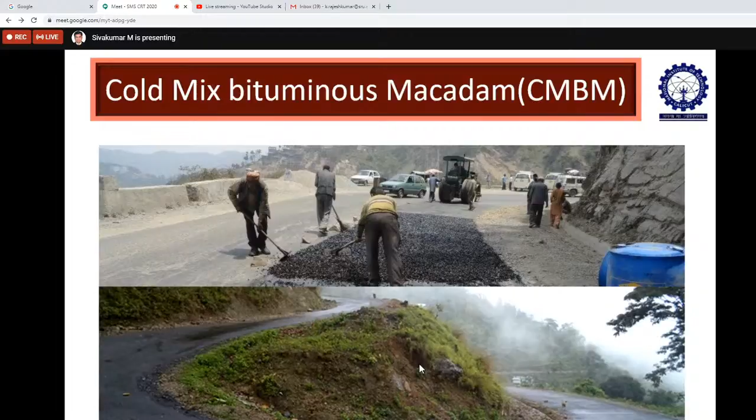As a summary, when you go for sustainable infrastructure development, the economy, environment and societal benefit - that is economical benefit as well as environmental benefit and social benefit - should be considered for implementing any sustainable technology. That is the point I want to mention as a summary of this presentation.